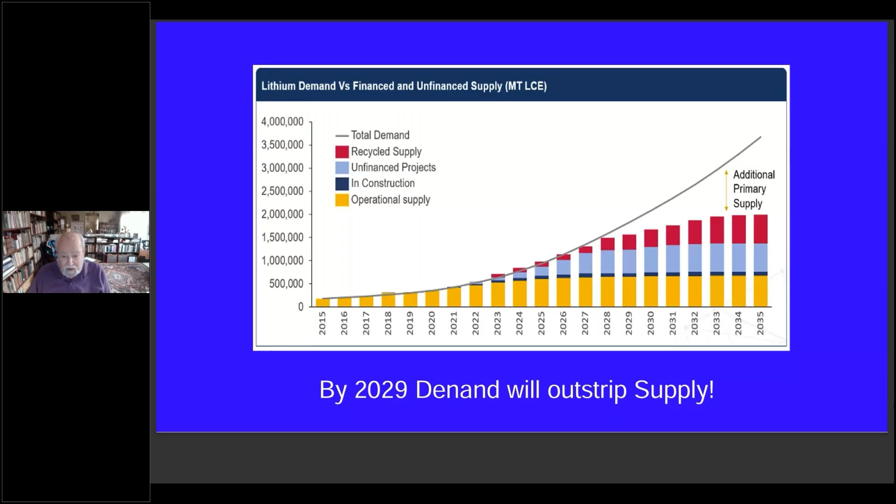And here is the graph. If you put all the various types of lithium reserves into a pot, it still isn't enough for the demand. And by 2029, demand will outstrip supply. Obviously, we have to do something.

We are looking for batteries using earth-abundant, domestically available, inexpensive materials. But at the same time, they should show performance characteristics similar to lithium ion. Doesn't have to be exactly equal, but they should be at least in the same range. And indeed, we can do that. Next, please.

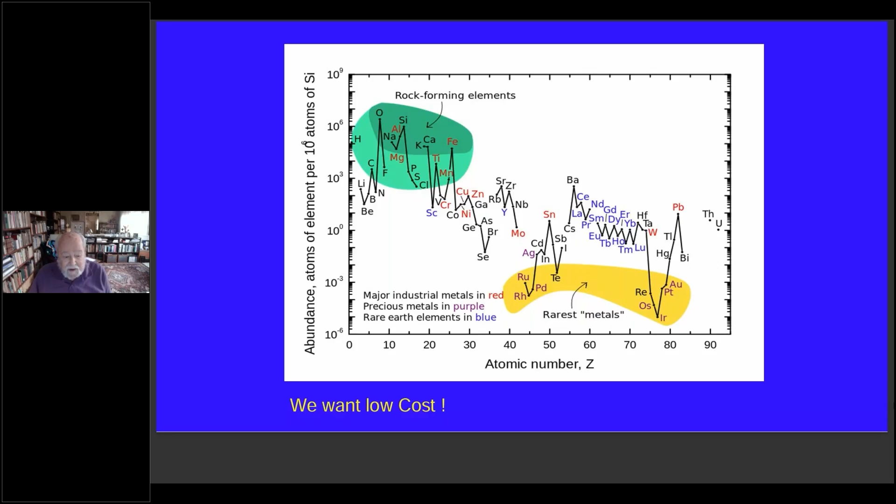Here is the chart of elements that are available. And where we want to be is up in the dark green of rock-forming elements. That means earth abundant. And you can see that sodium is right in there between oxygen and silicon, which is just sand. So definitely earth abundant. Next, please.

Is it less expensive? It certainly is. Lithium carbonate, the raw material for lithium batteries, is roughly $20,000 per ton. It varies considerably, but that seems to be the lowest price. Sodium carbonate, on the other hand, is $332 per ton. That's 2 orders of magnitude less.

And by the way, it's sodium carbonate, not table salt. Table salt is sodium chloride, and that's a different thing altogether. And what is really good is that there are 135 billion tons of mineable sodium carbonate available in the Green River Basin of Wyoming, right here in the US.

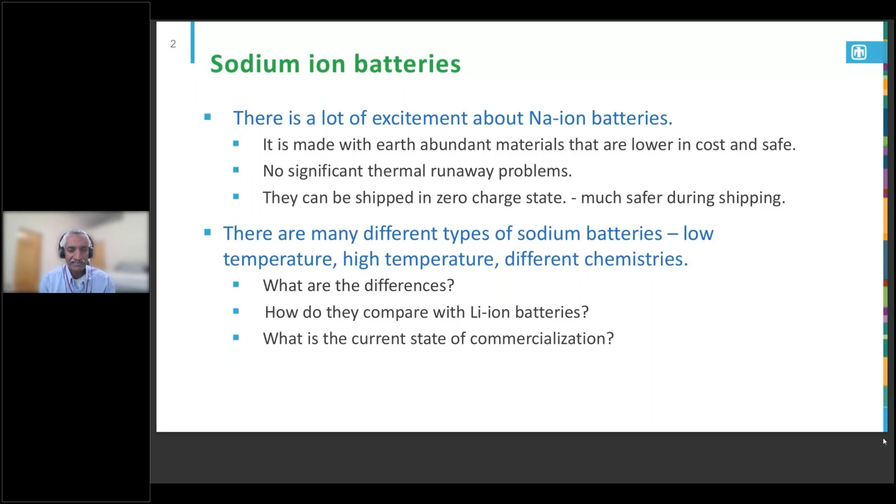There are many different types of sodium batteries. They're low temperature, high temperature, and different chemistries. So what are the differences? And how do they compare with lithium-ion batteries? And what is the current state of commercialization? So we'll touch on these aspects briefly in this presentation. Go to the next slide.

So this is a brief outline. First, I'll touch on some of the high temperature molten sodium batteries, followed by low temperature sodium-ion batteries that are analogous to lithium-ion batteries. We'll cover different chemistries, pros and cons, typical issues, and the current state of development. Next slide.

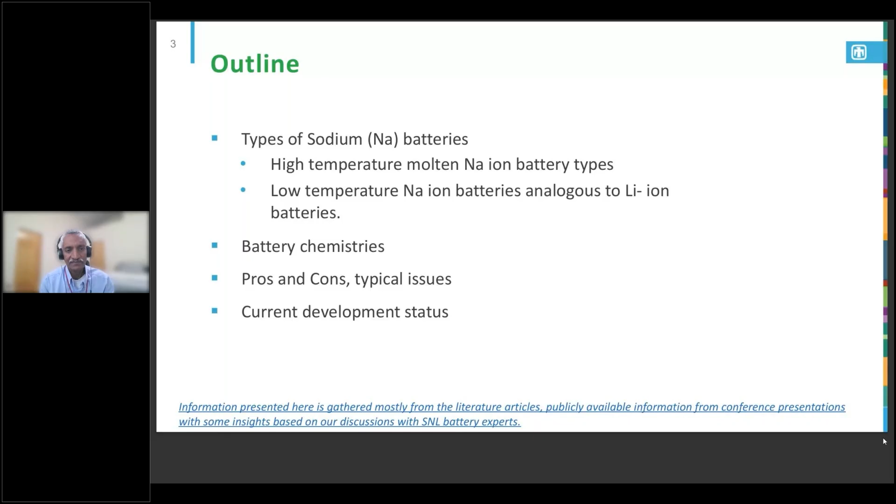So there are distinctly two different types of sodium batteries. One are high temperature, one are low temperature. These high temperature batteries are also called molten sodium batteries. Some are commercial, and some are still in the R&D stage. Sodium sulfur batteries and sodium metal halide are both commercial, and the intermediate and low temperature sodium batteries are still in the R&D stage.

Whereas low temperature sodium-ion batteries are, as I said, analogous to lithium-ion batteries. Some of them are early commercial, some at pre-commercial stage. Again, there are different types in these batteries also, based on type of anode and cathodes they use. For example, in the cathodes, some use layered oxides, some are polyanion, some are Prussian blue analogs, and in the anodes, some of them use hard carbon, some use Prussian blue analogs. So we will touch on them briefly. Go to the next slide.

Sodium sulfur batteries. This is one of the oldest battery chemistries, developed in the 1960s at the Ford Motor Company for automotive applications. This is a reaction between a molten sodium anode and a molten sulfur cathode, forming sodium sulfide. This molten sodium is contained in a solid ceramic tube made of beta alumina, so that's also the electrolyte.

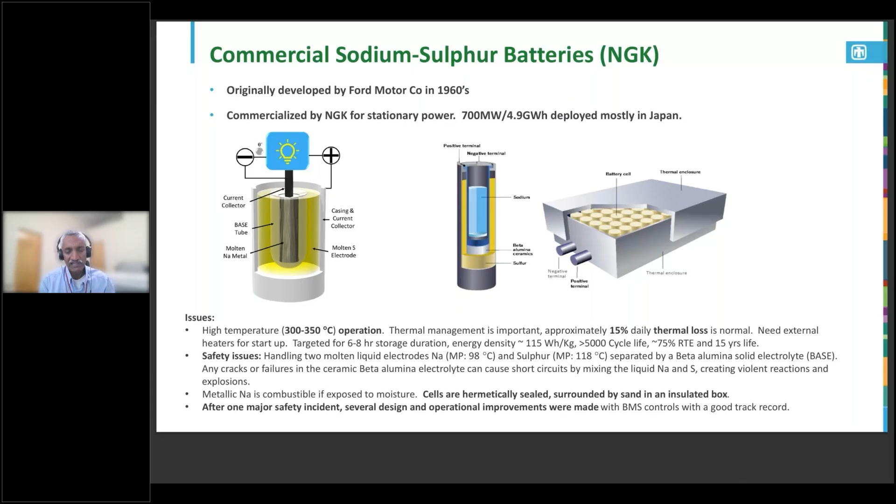They had one major safety incident in Japan at Tokyo Power. After that, they made a lot of improvements, and since then they really don't have any major safety accidents. They had good control after that. Go to the next slide.

Recently, BASF, a German chemical conglomerate, wanted to get into the energy storage area. They looked at a lot of different technologies and decided to partner with NGK and commercialize their sodium sulfur batteries market in Europe. They really don't change a whole lot in the design. They made some minor changes; the basic chemistry is the same, and the cell is the same. They made improvements in the safety aspects, and they actually passed UL 9540A container level thermal runaway tests. They are trying to commercialize this battery. Go to the next slide.

Another type is sodium metal chloride batteries. They are also known as Zebra batteries. Zebra stands for Zero Emission Battery Research Activities. It was originally developed in South Africa, but in the US, General Electric actually tried to commercialize these batteries for locomotive applications, and then they abandoned it after 5 years of putting a lot of money in it. These are commercial. Some companies are still selling them.

They also require high temperature operation, like 250 to 300 degrees Celsius. The difference here is instead of molten sulfur, they use molten sodium salt. These are slightly safer compared to sodium sulfur batteries. Energy density is slightly higher. Other than that, they're pretty similar. Go to the next slide.

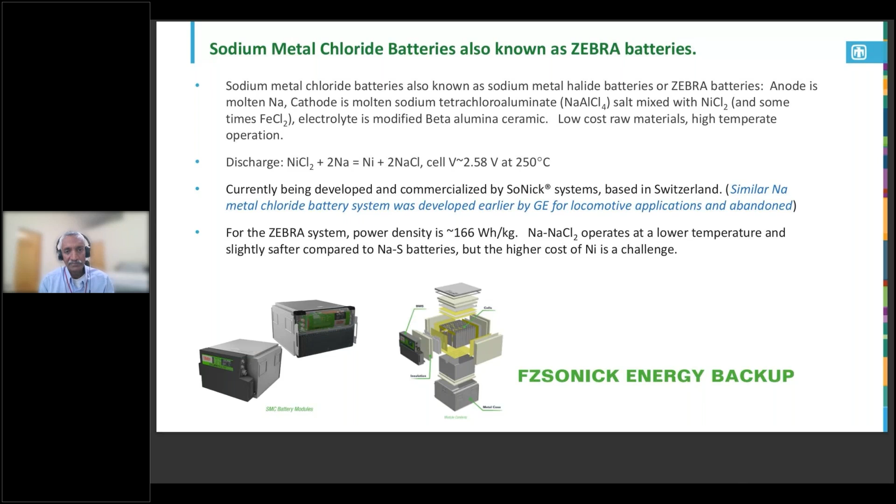These two are commercial, the ones I told you. And then these are pre-commercial, the next two I'm going to talk about. There are some companies trying to develop even lower temperature molten sodium batteries. One is Adena Power. This is out of Ohio State University. The difference here is they're using a NASICON solid electrolyte conductor instead of the sodium ion conductor that uses beta alumina, which is high temperature, which requires about 300 degrees C for sodium ion conductivity.

NASICON conducts sodium ions at a lower temperature, so about 125 to 150 degrees C is sufficient. The advantage is at this temperature you can use plastic seals. So they're going with a planar configuration and trying to develop these batteries. It is still in the pre-commercial to R&D stage. The next one. Next slide, please.

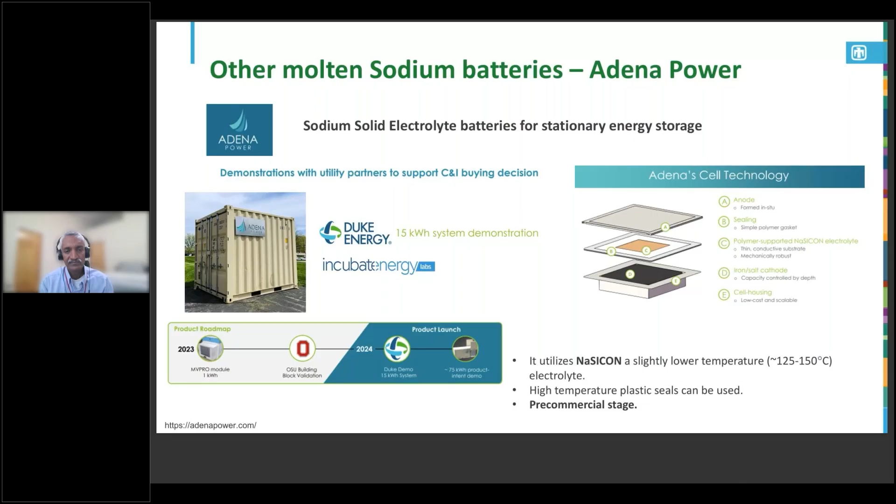This one is Enlighten. This is also in the early R&D stage. These guys came out of Ceramatec, which has a lot of experience in developing ceramic products and making NASICON membranes. So here, the twist on this one is they're trying to make a flow battery actually. The sulfur is in a sodium polysulfide on the cathode side, and on the anode side they're using molten sodium and a NASICON membrane. It is still in the R&D stage with some government contracts. They are developing this battery. Go to the next slide.

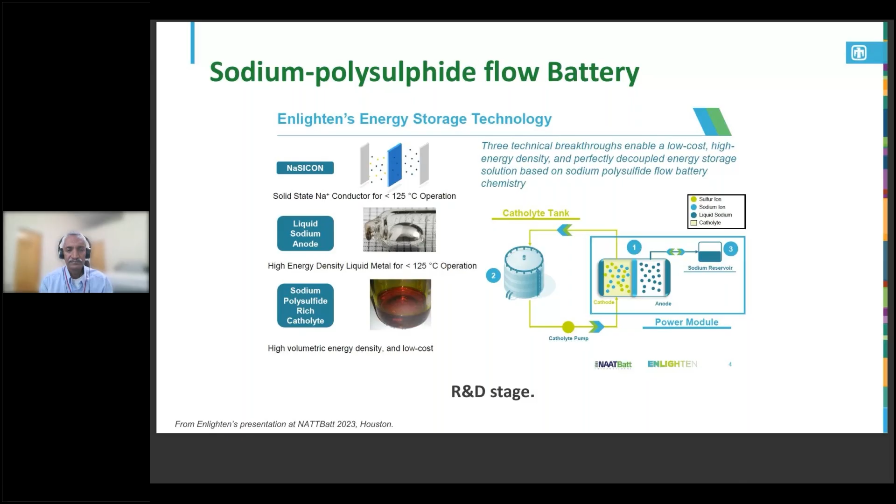Now we are switching gears to the low temperature sodium ion batteries, because until now we talked about high temperature batteries. These are very similar to the lithium-ion batteries. So you have an anode, either carbon or one of these layered oxides, and a cathode; sodium ions shuttle between the anode and cathode. Cathodes are sodium-based materials of different types, and anodes are hard carbon, some intercalation oxides, conversion alloys. There are 3 different types. And cathodes, I showed you, there are 3 different types there too.

Electrolytes are, most of them, organic. There are a few systems with aqueous electrolytes also. And the separator is a polymer membrane, very similar to the lithium-ion battery. One difference is the current collector. In a lithium-ion battery, you have a copper current collector on the anode side and aluminum on the cathode side, whereas these batteries use aluminum on both sides, which is cheaper and also easier to maintain. So during charging, sodium ions move from cathode to anode, and the reverse occurs during discharge.

In lithium-ion batteries, they shuttle between the graphite and the layered perovskites. The graphite anodes used in lithium-ion are not suitable for sodium-ion. They fail very easily during cycling. You need a hard carbon, which is actually disordered carbon, for the sodium-ion batteries. Sodium ions are slightly bigger than lithium ions, and they put more stress on the intercalation materials.

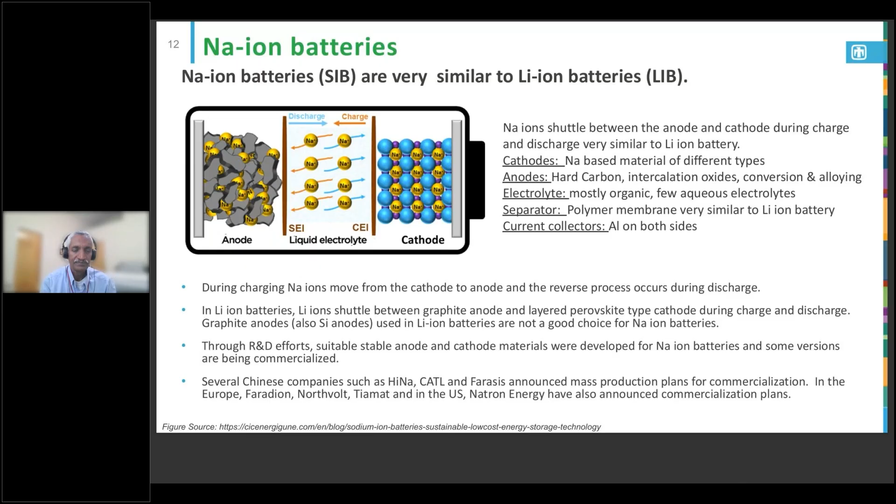And then, as I pointed out, they use aluminum current collectors on both sides, so slightly lower cost. I'm saying about 10 to 20% cost advantage for sodium ion compared to lithium ion batteries. Even though there is a big difference in lithium carbonate and sodium carbonate raw material cost, the amount of lithium in a lithium ion battery is only about 7 to 8%. The rest of the components are layered perovskites, current collectors, and the separator, so those don't change a whole lot. So the difference is in the lithium cost and the current collector cost. So about 10 to 20% cost advantage over lithium ion batteries. Go to the next slide, please.

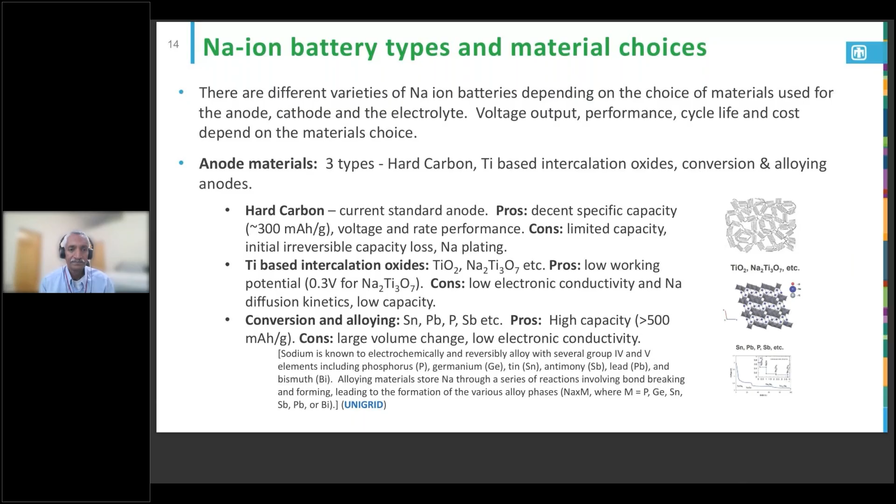On the cathodes, again, there are, you see, 3 different types: layered oxides, which Faradion is using, and polyanionic, Tiamat, and Prussian blue, which Natron Energy is using. The differences depend upon the type of anode and cathode you use. Battery energy density changes and also the cycle life.

Electrolytes: most of them are using organic solvents with sodium salts, very typical as in lithium-ion batteries, ethylene carbonate and propylene carbonate. The only difference is in the salts. Instead of lithium salts, they use sodium salts, like sodium perchlorate or sodium hexafluorophosphate. Only Natron is using aqueous electrolyte. It has advantages, but it has a lower cell voltage with the aqueous electrolytes. So the energy density is slightly lower, but it's safe compared to organic electrolytes.

Yeah, we already touched on the current collector. Lithium-ion batteries need copper at the anode and aluminum at the cathode, whereas aluminum is used at both anode and cathode in sodium-ion batteries. Go to the next slide.

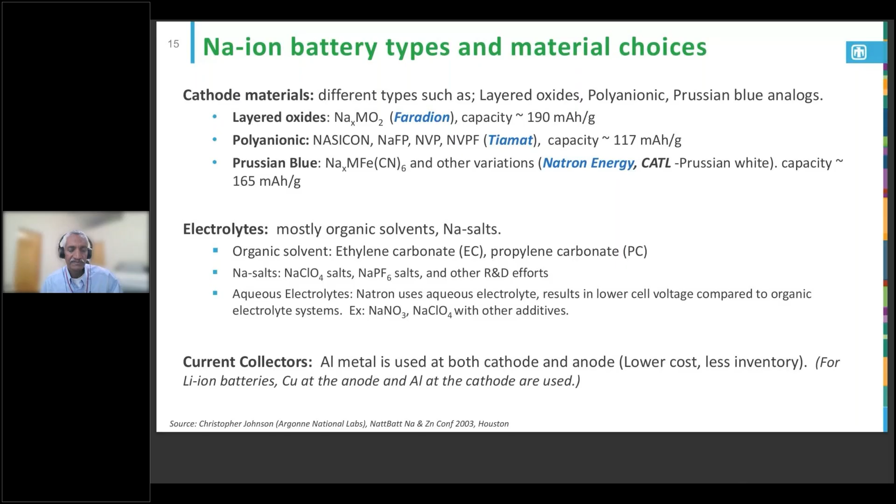Yeah, this shows a schematic summary of the things we just discussed. So on the anode side, there are 3 different types of anodes: hard carbon, intercalation oxides, and then conversion alloying anodes. On the cathode side, you have transition metal oxides, or polyanions, or Prussian blue. Electrolytes are aqueous or non-aqueous. Most of them are non-aqueous, and we see only a few aqueous electrolytes. Go to the next slide.

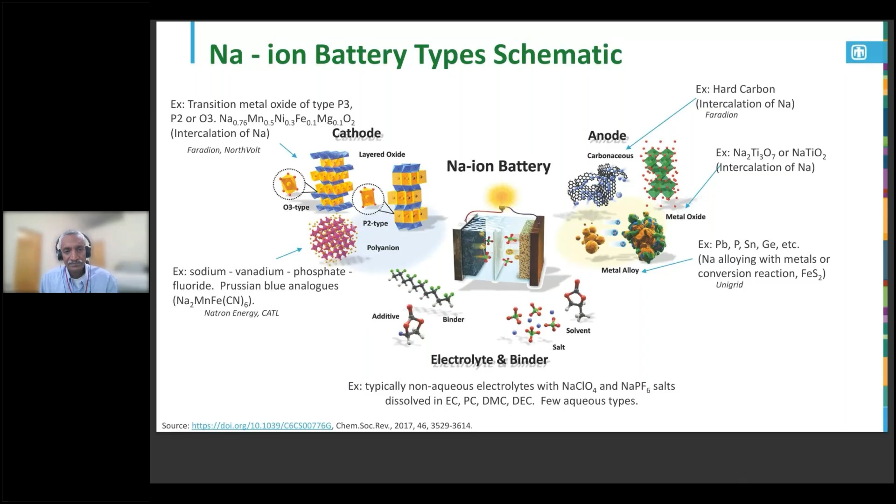Here I try to summarize, based on the literature information, some of the different types of sodium-ion batteries that are currently being developed by Faradion, Tiamat, HiNa, and Natron Energy. Anodes: the first 3 all use hard carbon, except Natron uses Prussian blue. That is the only company using Prussian blue analogs for both anode and cathode. Faradion is using layered oxide, Tiamat is polyanionic. Electrolyte: the first 3 are using organic electrolytes. Natron is using aqueous electrolyte.

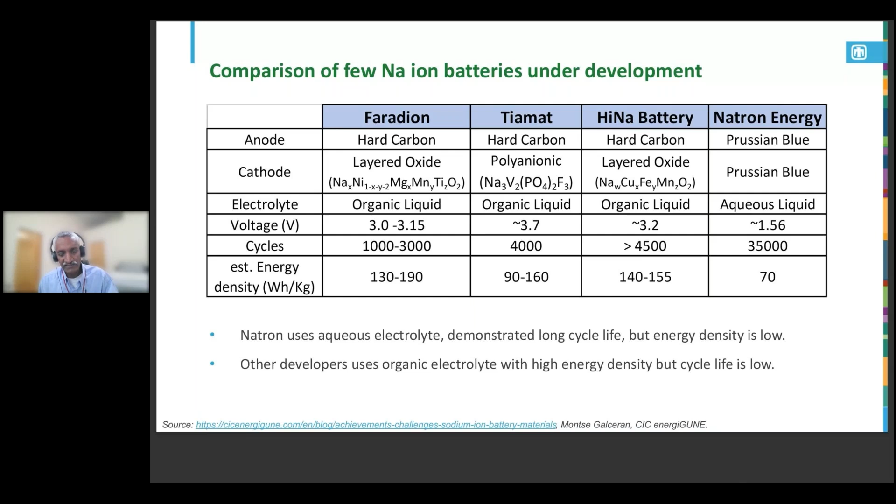So you can see that the voltage is lower compared to the other ones, and because of that, energy density is low. But if you look at the cycle life, they showed a very large cycle life. The Natron Prussian blue analogs have 3D structures with large, let's say, cavities for the transport in and out of sodium ions. Because of that, it puts less stress on the material, so it has a large cycle life. Go to the next slide.

So this is my last slide. Compared to lithium-ion batteries, sodium-ion batteries are lower in cost and use earth-abundant materials. They don't use any lithium or cobalt, and very low or no nickel. They utilize aluminum current collectors on both sides. So the main differences between these two are in the cathode materials and the current collectors. Because of that, the manufacturing processes are also very similar. So we have a 10 to 20% cost advantage over lithium-ion batteries because of the lower raw material cost.

They have a lower energy density compared to NMC batteries, but the performance is comparable to LFP batteries, which are their main competition. They offer better low temperature performance compared to lithium-ion batteries, and they can be stored and transported in a 0-volt state, so it's much safer for transportation. Whereas lithium-ion batteries you always have to store under some minimum charge.

As I discussed a little bit earlier, sodium ions are larger than lithium ions. It puts more stress on the anode and cathode during intercalation, leading to structural failures during charge and discharge. So cycle life is one of the important criteria. Except Prussian blue analogs, which have a good cycle life. The main challenges with sodium-ion batteries are increasing the cycle life, increasing the energy density, and scaling up for high volume manufacturing, which you're going to hear a little bit more about from Natron.

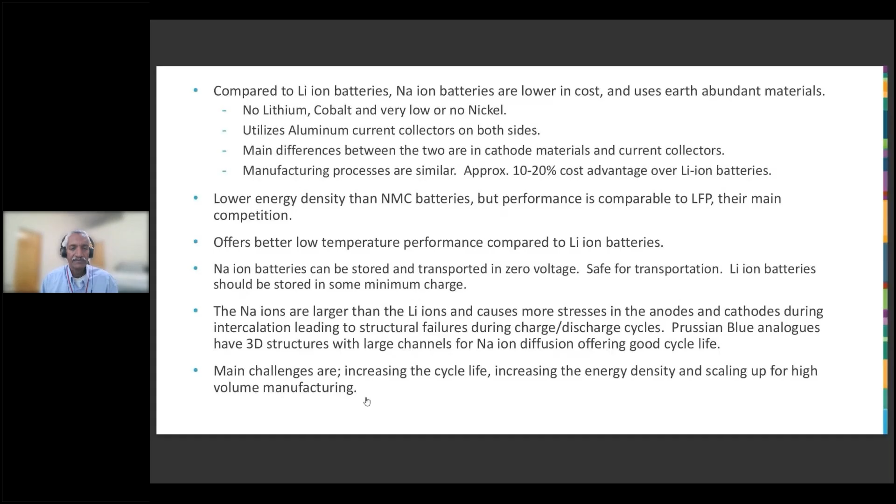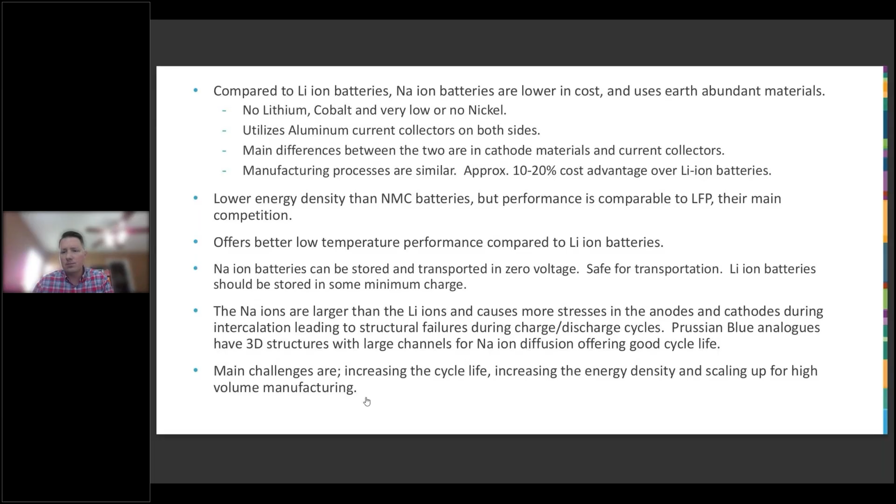We're going to hear from Alex Bates from Sandia on safety issues, and then from Jack from Natron on commercial markets and applications.

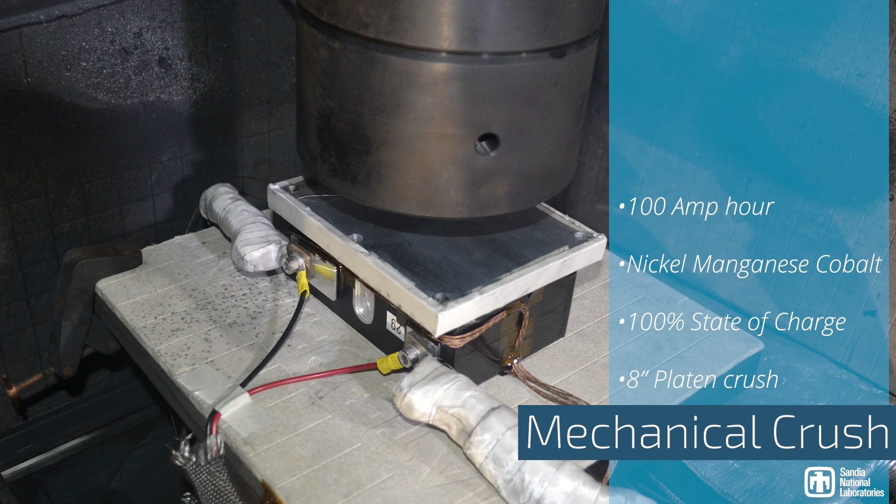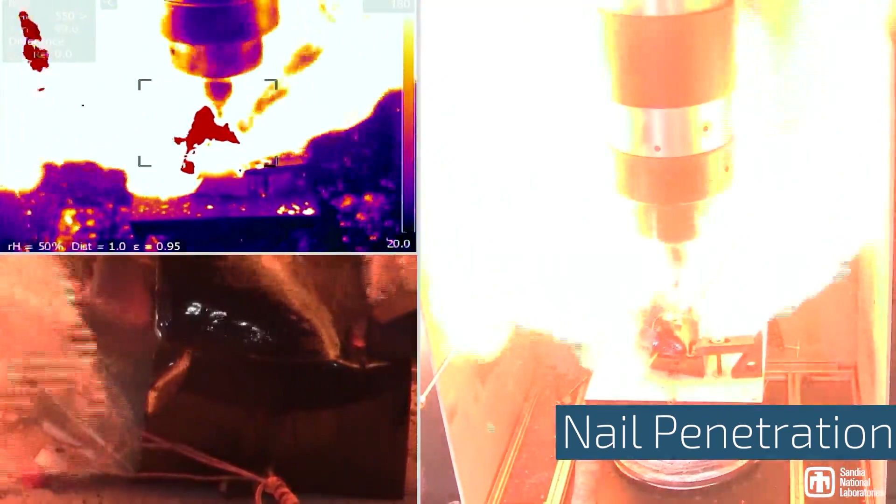So this is just a demonstration reel of some of the testing at Sandia. So if you can go ahead and play the video, I'll talk through it. All right, so this is a 100 amp hour NMC crush test. So NMC rechargeable lithium-ion battery. It causes internal shorting of the layers almost immediately, and of course the cell does not like that, and it burns. This is nail penetration, and it's a similar effect, but different on the can. In that case, you see a lot of swelling. So the pressure increase is too rapid.

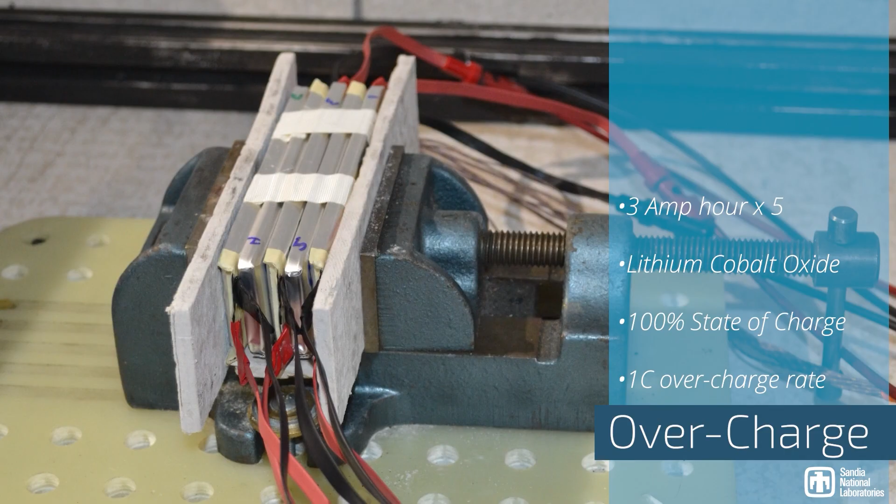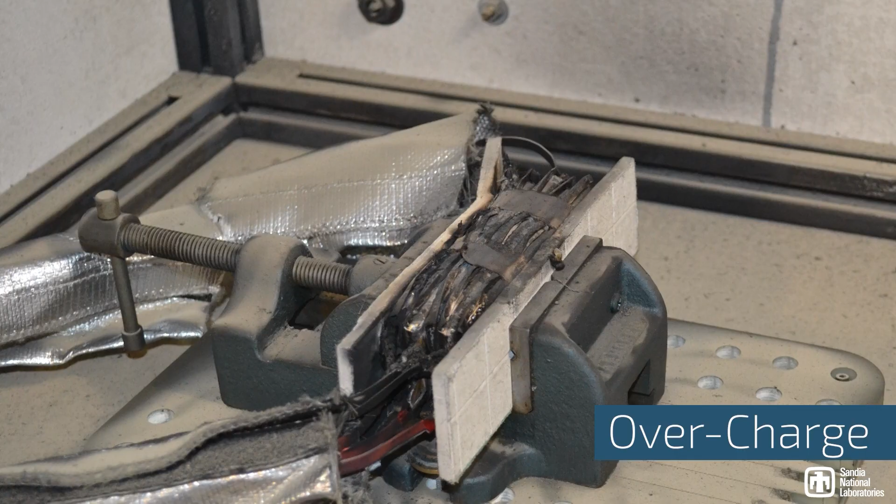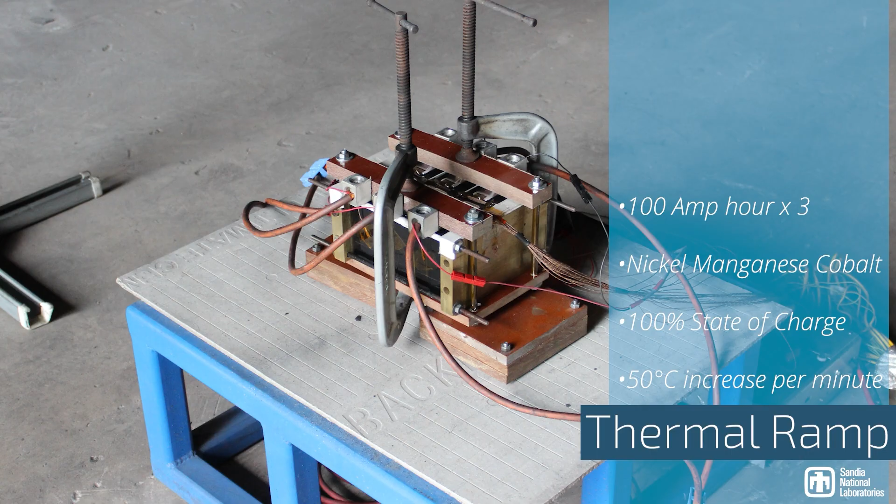This is the bunker. So this is the burn site out in the middle of the desert. This is a 3-cell 100 amp hour NMC pack. We're trying to look at propagation from cell to cell. In this case, the thin sheet of metal was capable of preventing that cell-to-cell propagation. So you can bring the slides back up. There are a fair amount of videos in this presentation, so please bear with us.

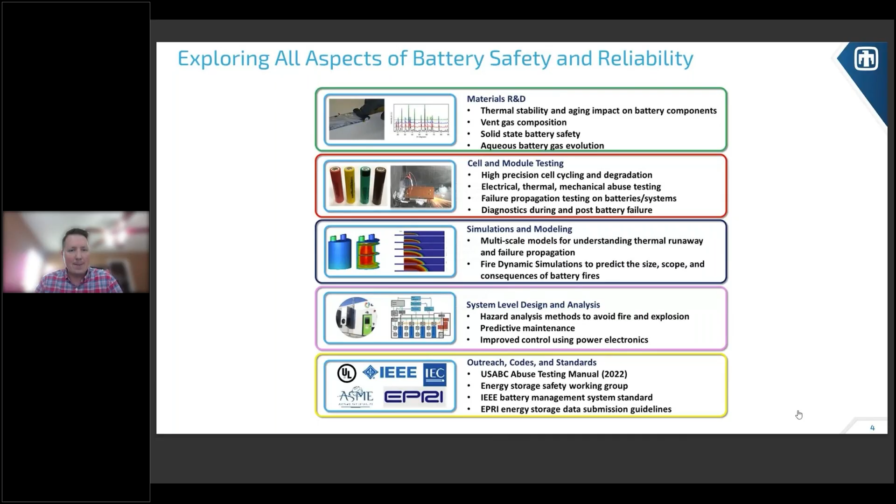This slide is to demonstrate that Sandia does safety from materials level all the way through codes and standards. My colleague, Loraine Torres-Castro, co-wrote the USABC Abuse Testing Manual. I like to highlight the center bubble, that's simulations and modeling. We do expensive testing, so we make every effort that we can to take that data and utilize that data in simulations and modeling. I can go ahead and go to the next slide. So that's it about Sandia's capability.

So we'll move right into sodium ion safety. As Ramesh mentioned, sodium ion is intriguing because of potentials for lower materials cost. It also has similar performance to lithium ion. And one of the key factors is that it has similar fabrication requirements. So it's kind of plug and play. You can go ahead and click through, I think, twice just to bring everything up.

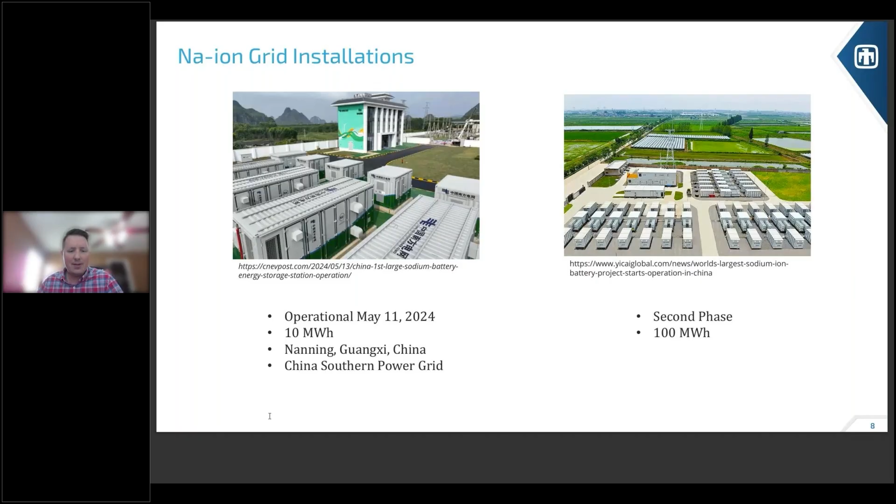So I'd like to preface this: sodium ion is commercialized. It has been commercialized by a Chinese company. They have a 10 megawatt hour grid installation that went operational May 11th. And they're planning to increase that to 100 megawatt hours. Next slide. Yeah, click again.

So the iteration that we got is what's shown here. We received these at 1.5 amp hours. We tested them. They came out experimentally at 1.43 amp hours. If you look at that in terms of energy density, you get 123 watt hours per kilogram. That's with the case. However, if you're not familiar with these numbers, that's pretty substantially lower than a modern commercial lithium ion.

We did some materials characterization. So we took the can apart, took all the materials out, did characterization. We found this to be the layered metal oxide variety. So if you recall from Ramesh's slide, there's a layered metal oxide, there's a Prussian blue, and there's a polyanion version of current cathodes for these cells. This is the layered metal oxide iteration. As he also mentioned, hard carbon is pretty prevalent. These were hard carbon anode.

The salt is kind of a corollary to lithium ion, which is LiPF6. In this case, it's NaPF6, or sodium. And then the solvent that you see there is a combination of typical organic solvents that you would see in a standard lithium-ion battery. So there's almost no difference in the type of solvent in this cell between sodium-ion and lithium-ion. Next.

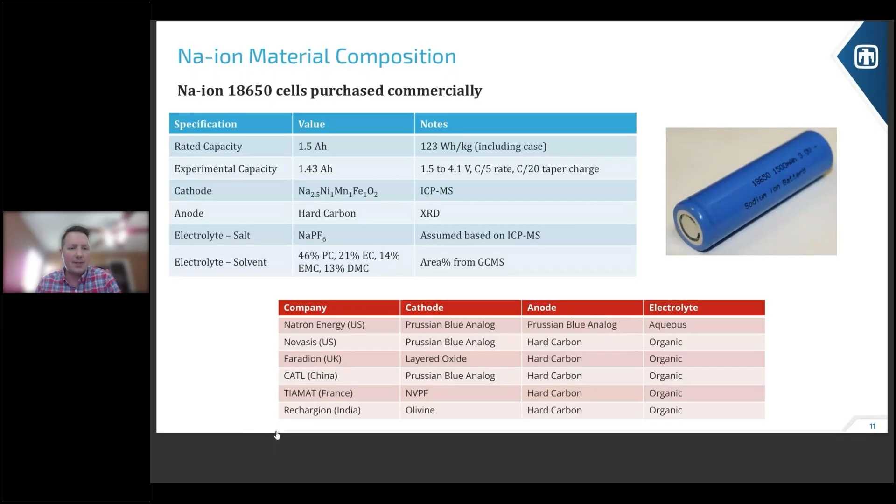I think we have another video. Yep. So this is sodium ion 18650, commercially purchased from an overseas vendor, and we're doing a nail penetration on this cell. Yeah, most of the rest of the videos are pretty quick, pretty abrupt. You can go ahead and bring the slides back up.

Now, there's a bit of an asterisk here. NMC cells do tend to be pretty destructive under nail penetrations, but this cell was quite low in capacity compared to modern lithium ion NMCs. And so we believe that's why the lower temperature was obtained. Of course, you saw in the video, the sodium ion was quite destructive in its failure response. There were sparks, smoke, venting, and it broke itself free from that fixturing.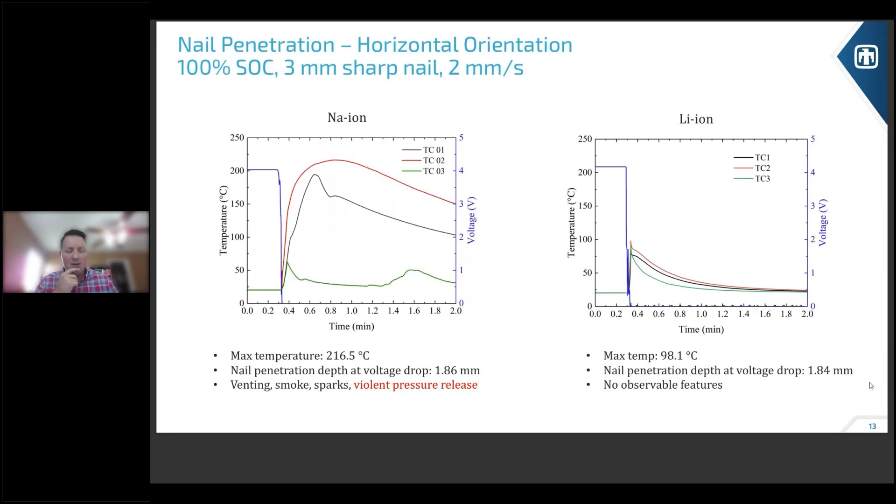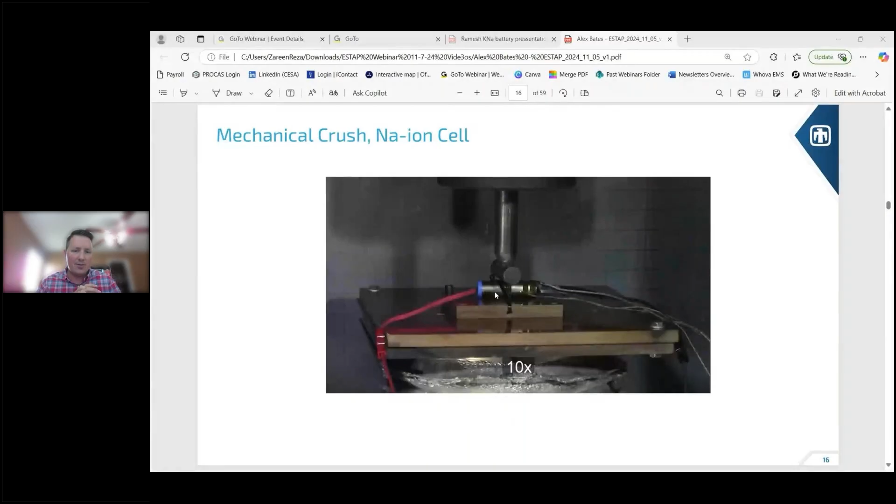So the next test we did, we call a crush test, or a mechanical crush. This one is a video, so you can go ahead and bring that up. We have a hammer type implement that we drive into the cell. So we're just simply pushing that round bar into the cell horizontally.

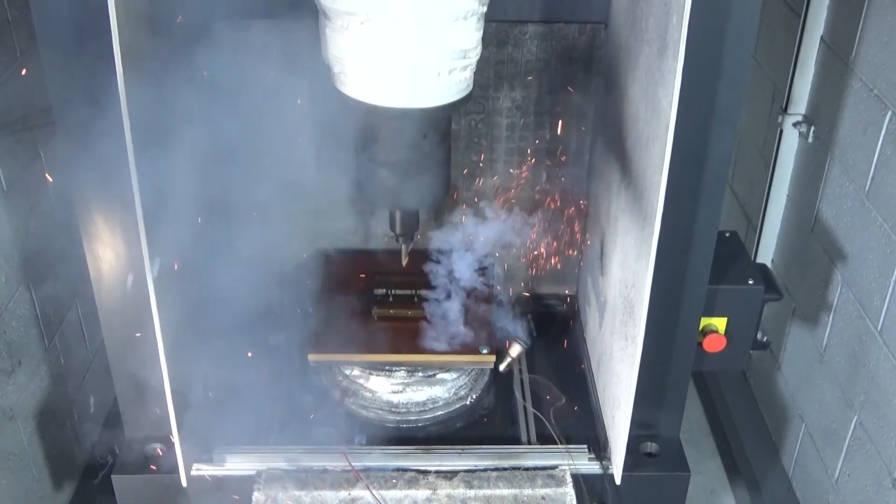Yeah, that's the slowed down version of the nail penetration. I like to show that in live presentations because it's kind of more dramatic. But yeah, go ahead and play the next video.

So as you can see, it's kind of a similar response to the nail penetration. The hammer implement was holding the cell in place, so it didn't remove itself from the fixturing. But you got a similar response, that kind of rapid pressure increase that blows the lid of the can off.

Yeah, thank you. And then you also saw that there was a smoldering ember next to the cell, and that actually caught the vent gases on fire. So they are flammable under the right conditions, which we would expect because, as I said previously, it is a mixture of typical organic solvents that you would see even in a lithium-ion battery.

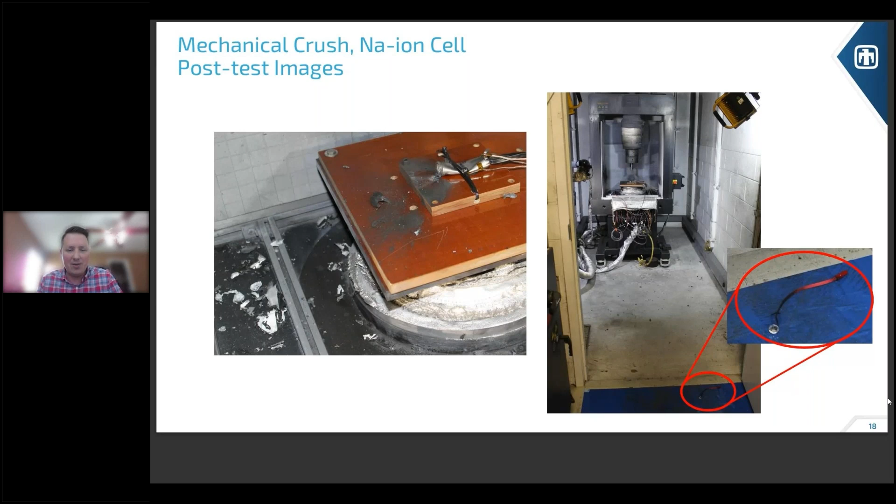There's normally a door closed during this test, and that door was closed. But when we came in, we found the cap of the 18650 had actually ejected all the way out of the bay underneath that door. Next.

So we're moving on to a different type of test. This is an external short circuit. So we have the cell fixed to a circuit that we close, and when we close, it allows the cell to dump all of its energy almost immediately.

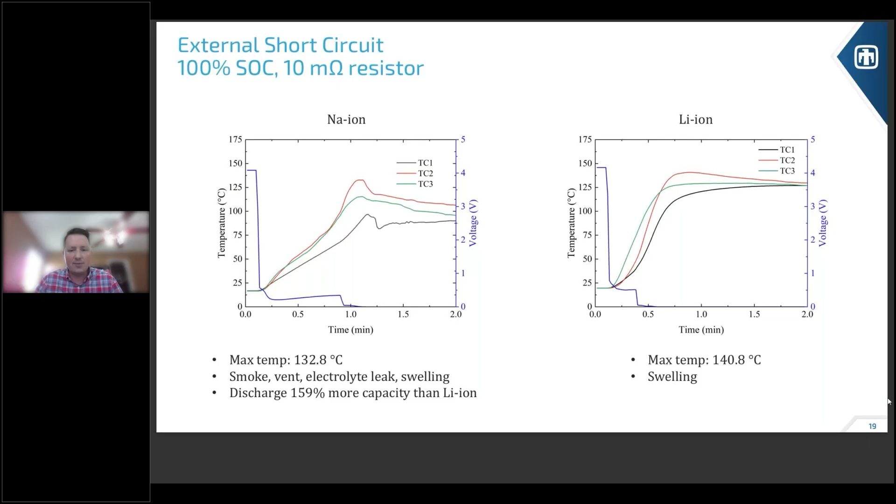The lithium ion and the sodium ion both got to about similar temperatures, around 140 degrees C. The lithium ion only swelled, but the sodium ion actually smoked, vented, and had electrolyte leaking out. And it discharged 159% more capacity than the lithium ion. So next we have another video. You can go ahead and play that one.

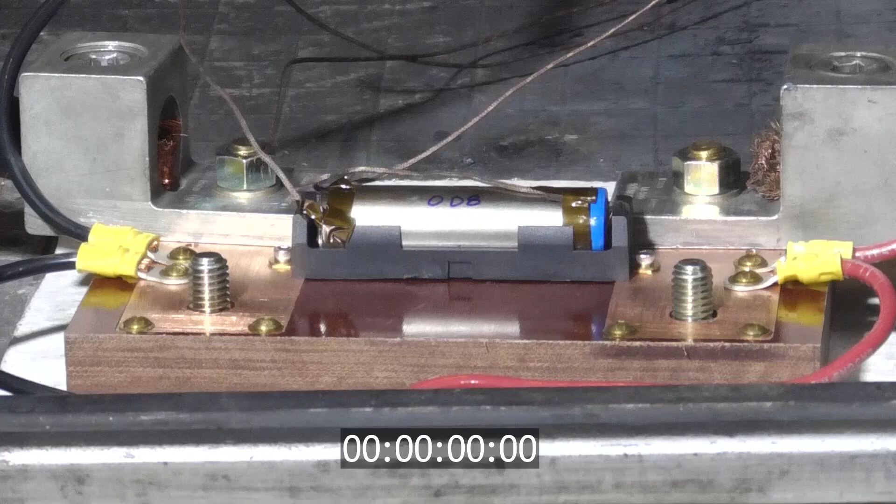Normally for external shorts, we don't see a whole lot. So it was a little surprising to actually get a vent, a diffused vent in this external short. So at first you'll hear a loud sound. It's the external contactors closing.

You will see a little bit of smoke that's from the fixturing getting too hot, but then you'll hear an audible pop that's from the vent itself. And then if you look below the fixture at the vent, you'll see some leaked electrolyte.

Okay, so as I described from the external short, the sodium ion showed us more than the lithium ion. Like I said, there was a vent and leaking, which we don't normally see for lithium ion. So that was interesting. And I think it's a product of what Ramesh said, the sodium ion cells, they can be a little bit more performance based in the discharge aspect, which, as I said, we discharged more in that external short. So we see that.

We were a little perplexed by this at first. We actually did a repeat test just to make sure that this was valid, but it is, and if you think about it a little bit more, it makes some sense. Both of these sodium ion and lithium ion cells are layered metal oxide cathodes. They both have a carbon-containing anode, and they both have organic liquid electrolytes. So there's a very similar corollary and composition between both 18650 cells.

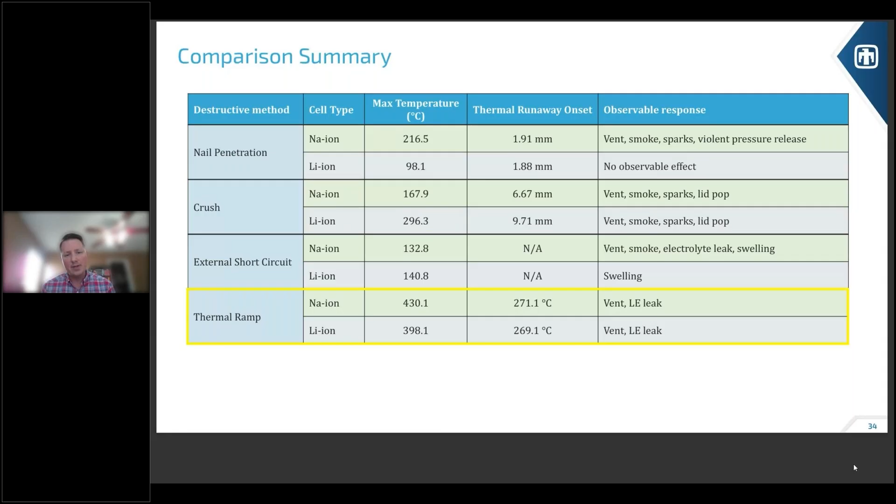The key takeaway here is that sodium ion is not good under mechanical failure. Mechanical failure tends to result in this rapid pressure increase and destruction. And we also had a more robust failure under external short circuit for sodium ion than lithium ion.

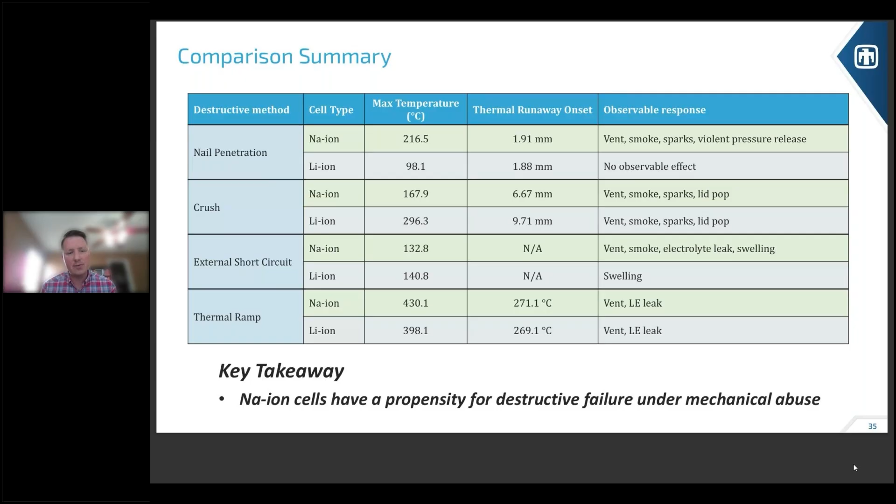Next. Okay, so I like to preface this next section, and I'll try to go through this quickly because I think we're kind of hitting some time constraints. Maybe we have one more presentation.

This is the Ford EcoStar. So I don't know how many of you have seen the Ford EcoStar, but sodium sulfur technology was first looked at Ford in 1965. And then it was researched off and on for about 30 years. And then in '93, they decided to make 100 prototype EcoStars. This was a sodium sulfur technology, so totally different than what we have today.

But these cars were expensive. They were hand built, and they took a lot of time, a lot of research hours to make. But unfortunately, between '93 and '96, 2 of these vehicles caught fire while charging. And then in '97, Ford shut down the program entirely.

So of course, they definitely learned a lot through this whole process, but at the end of the day, they had nothing that they could profit from. So a lot of time, energy, and money went into this development with nothing to show at the end in terms of profitability. The reason I like to show this is at Sandia, we are very interested in safety at

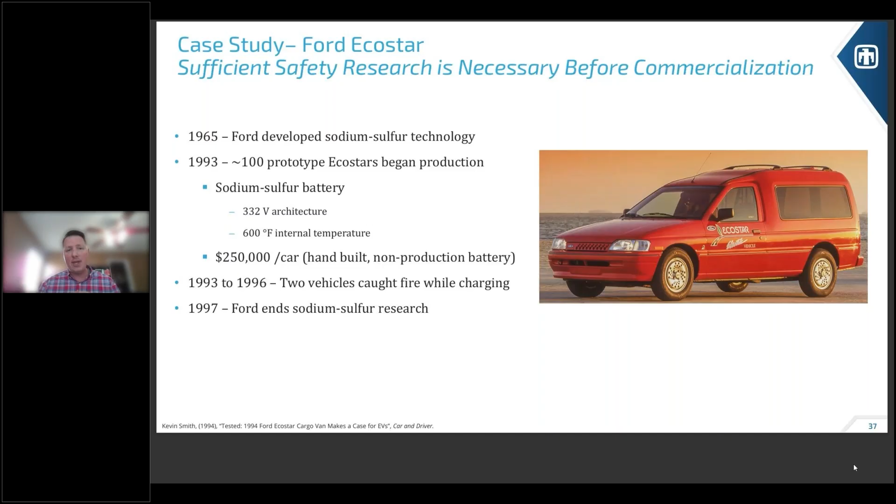the material scale. Now, if Ford had access to some of the capabilities that we have now, they may have done some materials level analysis that gave them insight into why this failure happened or why this failure could happen. And they may have made some different changes in the direction of the program. They could have implemented more engineering controls, or they could have better made some changes at the material scale to prevent this kind of destructive failure.

Next slide. Okay, so this is, again, as I said, material scale approach to safety analysis. This is kind of a new area of research at Sandia and even across the whole research field. At Sandia, we're looking at a handful of new chemistries, things like lithium sulfur, sodium ion, solid state batteries, and we're using this similar material scale approach.

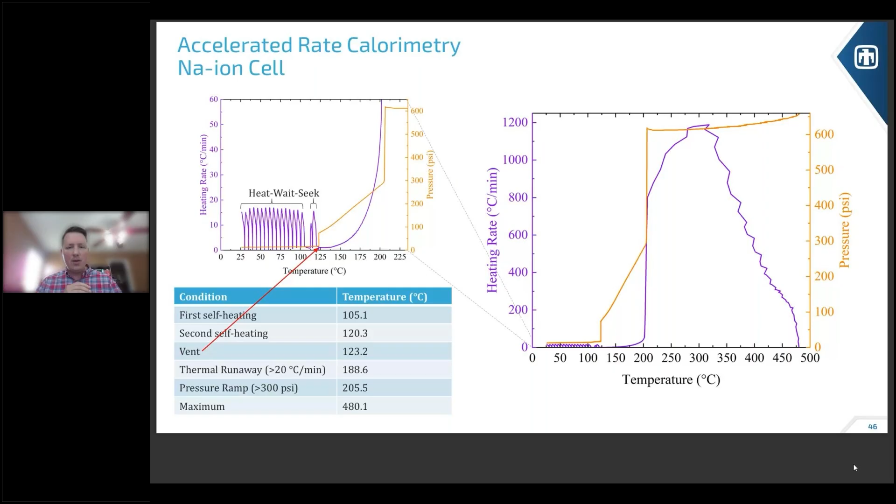So why am I showing you ARC? I'm showing you ARC to compare to the DSC. The top plot is a full 18650 cell. That's the cell that we purchased, we got in our hands, we stuck it in the ARC, and then we ramped up the temperature and looked at the response. The bottom one is the one that is only 4 millimeters diameter. So just very small sample sizes and a calorimeter.

What I want to demonstrate is that there is a corollary between the materials and this large scale response. Next. So you're going to see a line pop up. Oh, did we just, yeah. The first dashed line corresponds with self-heating in the full 18650 and the small exotherm in the DSC. The second dashed line corresponds with the second self-heating and the medium-sized exotherm in DSC.

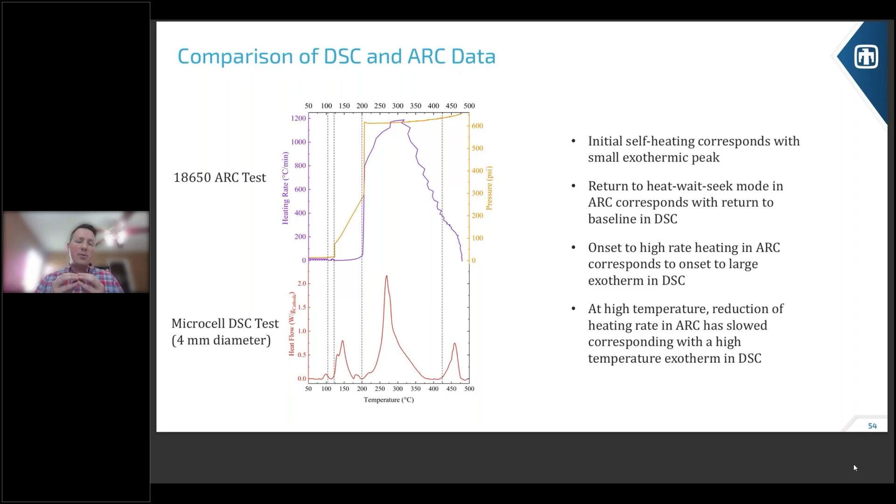And then the next dashed line at 200 degrees C corresponds with the onset to thermal runaway, which also is the onset to this largest exotherm. So now we have a direct corollary between a very large exotherm at a very small scale and an actual thermal runaway in a real 18650 battery.

Next. I think this is pretty much the end, so I have a couple things to point out. Actually, this is an important slide. Rachel Carter at U.S. Naval Research Labs has also done testing on sodium-ion batteries. This is ARC, similar to what I showed you before. The red curve is the same cells that we had at Sandia. And her results on this ARC testing correlate very well with our results. We're seeing the same things.

But the reason I like to show this slide is that the blue curve is a Prussian blue iteration of sodium ion, and the green curve is a polyanion iteration of sodium ion. You can see that the blue and green curves have a very different response to that red curve. The blue curve has a much higher temperature till it actually hits a self-heating event, and the maximum temperature is quite low compared to the layered metal oxide.

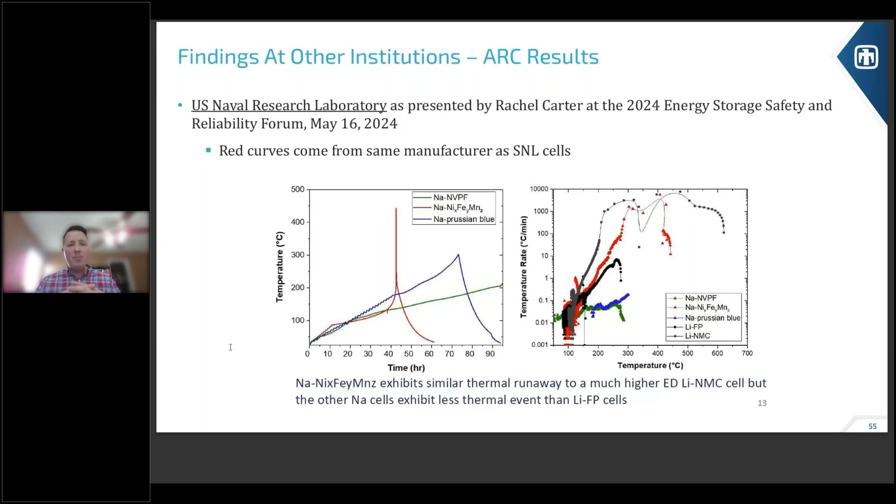And so what I mean to demonstrate here is that not all sodium ion batteries are created equally. The current version of commercial sodium ion appears to be quite dangerous and even on par with lithium ion. However, other types of sodium ion, it appears, may be much safer than the type of sodium ion that we got at Sandia. Next. Sandia is doing a cycling reliability study.

If you're familiar with some work that Dr. Gyuk has supported at Sandia for quite some time, they did this for lithium ion. Yes, of course, I'm almost done. And we're doing a very similar study for sodium ion, also funded by the Office of Electricity. Go ahead, next slide. I think that pretty much concludes it.

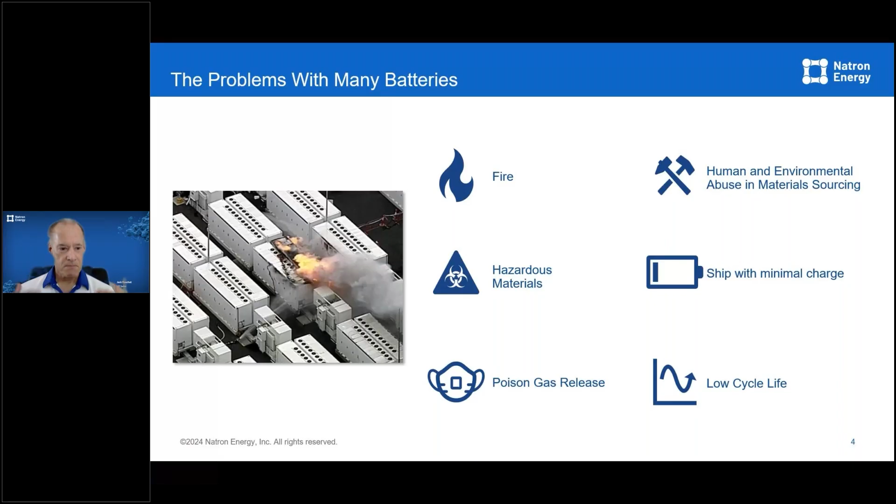So when we look specifically at Prussian blue analog sodium ion batteries, we eliminate many issues that we have with batteries. As previously noted by the other speakers, we don't get energy density. That's fine. Stationary power we're talking about here, and many other applications, military, industrial power applications where space is really not a constraint. Loss of life, loss of materials, those are critical. High cycle rate, as noted by a few others. When we get into the Prussian blue analogs, we're going to get more specific on that in a moment. You get the benefit of very low internal impedance, very, very high cycle rate.

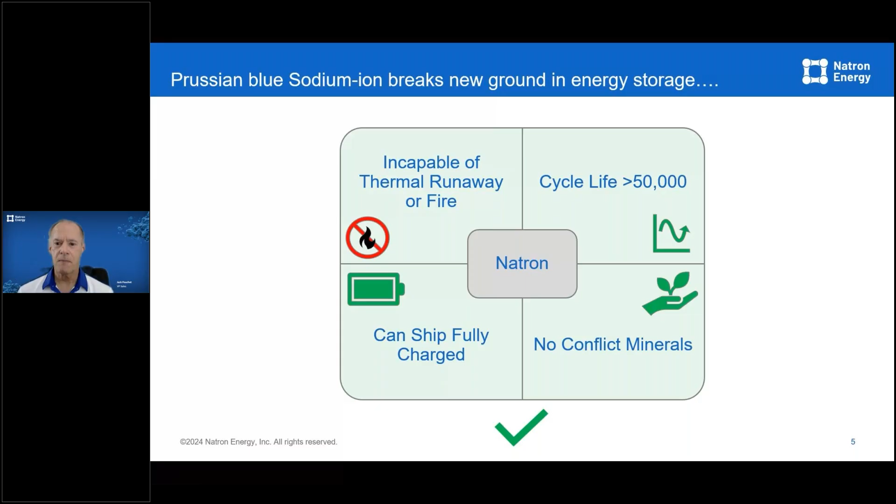Move on to the next, and I'm trying to accelerate my rate of speaking, so please bear with me.

Got a couple other things, and CATL and HiNa brought this up a couple of years ago. One of the benefits of sodium ion when we look at the EV application, of course, it does involve hard carbon and thermal runaway, but you can charge it at low temperatures. With Prussian blue, you can charge at -50. You can discharge at -50. You can also run at very high temperatures. So you get a really wide dynamic range.

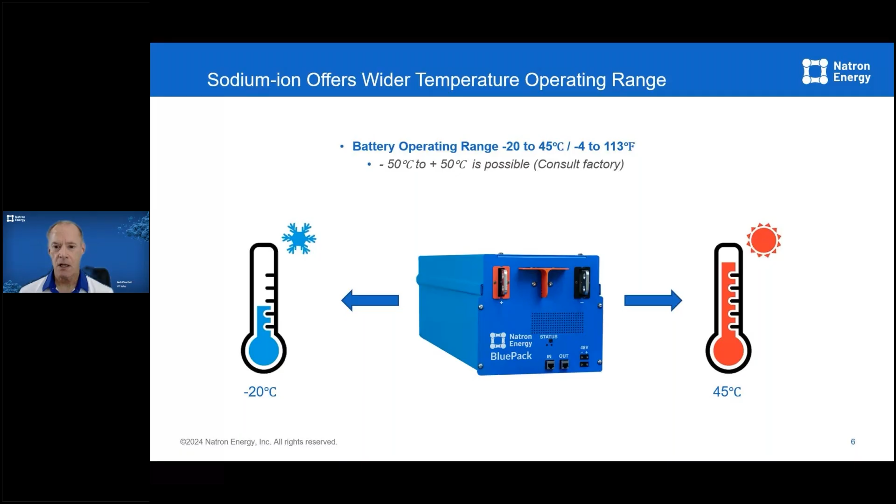Again, stationary power, what does that mean? Well, the lower cost of installation. You don't have to keep these things as cool. You don't have to keep them as hot in the wintertime, right? So when you look at the overall system benefits, you might find that when you look at sodium-ion batteries, there's unique benefits that you get at a total system installation cost point. Let's move on.

We'll go on to safety. And I really appreciate those videos. Those were phenomenal. Folks, if you go to Natron's website, you can see some incredible videos. We model most of the UL 9540A testing, the nail penetration test, love it. I'll just share with you, every safety agency that has tested our battery so far has said it is the most boring battery that they have ever tested. We have taken them up over 350 degrees Celsius, and they still put out voltage. We actually had the electrodes burn, not on the cell, but the test equipment.

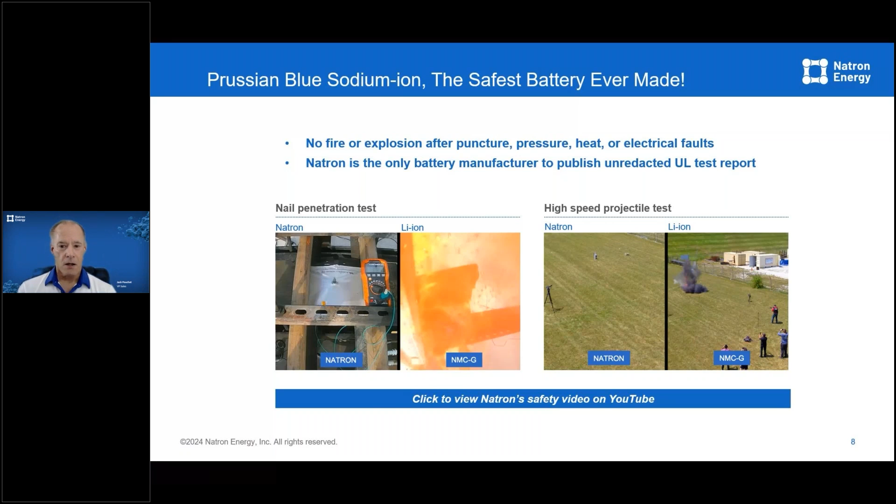Projectile testing, nothing like shooting it with a 5.56 or a 7.62 round bullet and finding that nothing happens. There's no acid leak, there's no outgassing, there's no hazardous materials, and the cell or battery continues to perform. Next. Next slide. Okay, so there we go.

Again, Prussian blue analogs. Not all sodium-ion batteries are created equally, as was previously noted. With Prussian blue analogs, we can ship these fully charged anywhere in the world by air, right? So that safety also translates into speed of installation, speed of use, because if you can get your battery to a site fully charged, you might save anywhere from 8 hours to 2 days. 2 days would be a nickel zinc battery, but you might be saving up to 2 days to get that system up and fully charged, right? You're good to go. Some huge benefits there.

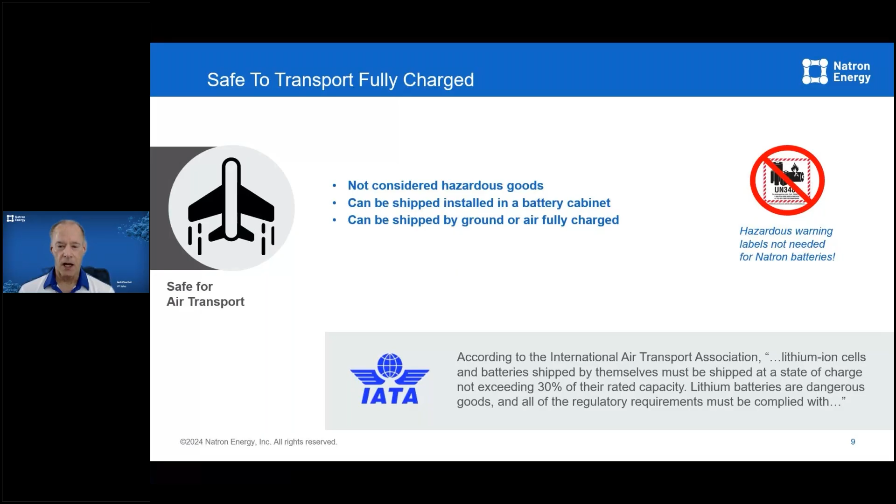Next. I want to get a little bit into some of the technology. Thank you. So, with Prussian blue, intercalation is not a problem. So if we hone in on, and we're not going to put it on this slide, but if you hone in on the lattice structure of the Prussian blue framework, you see it is a space roughly about 1.2 angstroms. And if we look at the sodium ion, it's 0.9. So the beauty is that we can intercalate with ease.

The internal impedance is somewhere between 1/4 to 1/10 of what we see in traditional lithium ion or other battery chemistries. And that allows for rapid charge, rapid discharge, no deformation, no requirements for SEI layers, high cycle count, no thermal buildup. I mean, it is a unique set of properties. What do we give up? As previously noted in the other slides, you give up energy density. We're talking stationary power, folks. Land's cheap. All right, next slide.

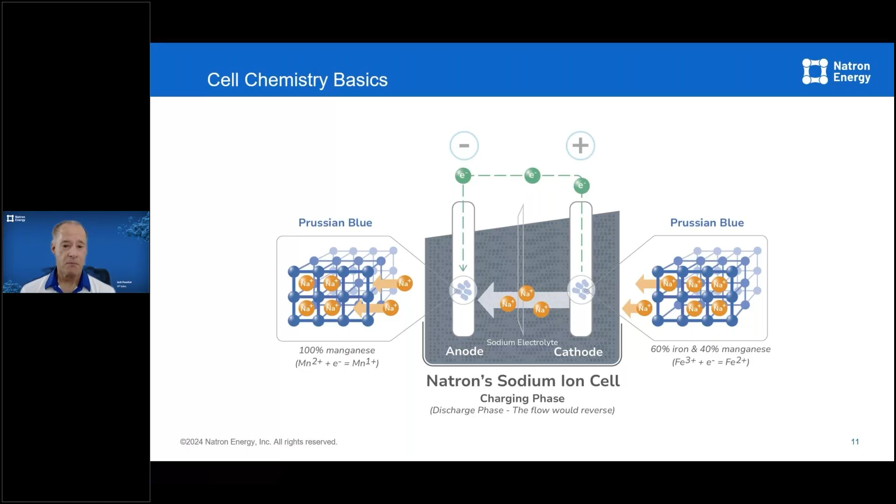Yeah, so as I said, so what do we get for benefits? Rapid charge or discharge. When I say rapid charge, we're talking about an endothermic reaction when you do charge. Not exothermic, endothermic, right? So you heat it up a little bit, and remember, very low internal impedance. So 98, 99% round trip efficiency on these cells. You're not getting a lot of heat on discharge. And when you go to recharge, it's cooling off. Again, net benefits, rapid recharge, 8 to 10 minutes to full charge, provided you've got the current to do that.

So you have a battery that can cycle a lot, can operate over a wide temperature range. And I'm just going to talk cycles for a second. This is becoming public information. We have now tested over 1 million cycles. Okay, now that's a special load profile, but that's beyond ultracap territories that we're in with very minimal degradation. Next slide.

And I'm trying to be aware of time. So let's move on to, yeah, thanks. We're going to tee up the next one.

So I really like looking at what goes into batteries, right? When we really dig into LMC or NMC, LCO, come on, we got cobalt right there in the middle of the forehead, big C there. Whether it's cobalt, and all of the issues associated with the mining practices, the human elements involved with it. Lithium. And lithium is the poster child of digging up hundreds of thousands of pounds to make a battery, displacing indigenous peoples around the world, watersheds.

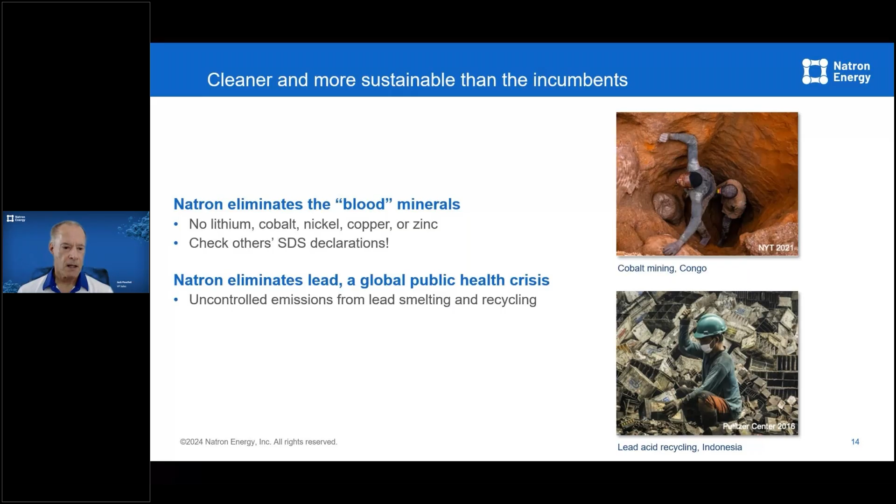So, yeah, thanks. So supply chain, made in America. We know that CATL and HiNa, BYD and others are doing, the French are doing sodium ion chemistries. We know the UK, India. It's being developed around the world. Prussian blue, a lot of patents, a lot of protection, made in the United States. Santa Clara, Holland, Michigan. Natron announced a Gigafactory in North Carolina for a 2027 timeframe.

So very excited about the batteries being made here, but more importantly, the raw materials for the batteries can and are being sourced in the United States. And as we look at what's going on around the globe, we certainly want to take advantage of local resources as much as possible. I don't plan to buy land in Wyoming, but I do appreciate the insight to how much sodium carbonate is available in Wyoming.

When we look at this in terms of supply chain, logistics, there's a tremendous amount of benefits. The interesting thing, from our perspective, is that with Prussian blue analogs and most designs of sodium ion technologies, you can put these into a lithium ion factory. So you're not reinventing the wheel, you're not creating a new framework and a new platform from a manufacturing perspective, right? You don't need new equipment. You use very similar equipment. You do plate thicker, so we didn't get into that. I'm looking at the time clock and I realize people are going to have questions.

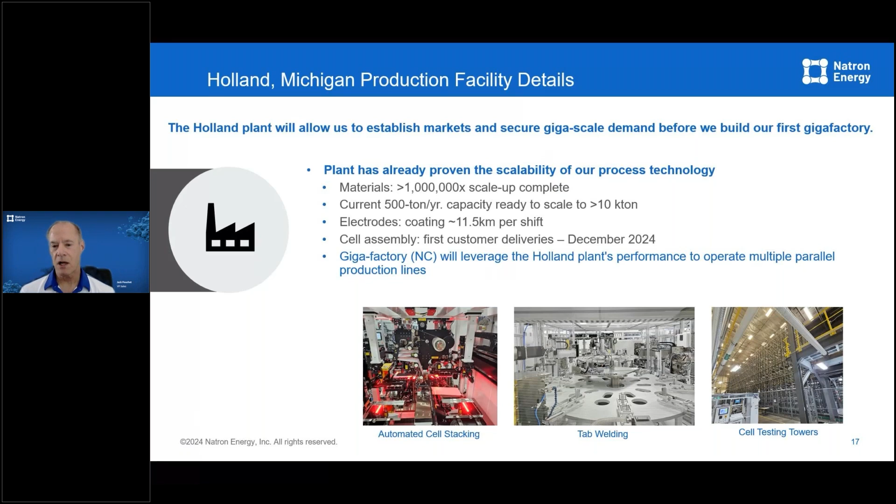If someone has run a lithium-ion battery plant before, you eliminate a couple steps. You don't have an SEI boundary layer. You don't have a formation step, so you take that out of the factory, and pretty much everything else looks very similar to what you would see in a lithium-ion factory. But we'll move on. And again, supply chain, very easily controlled, can be duplicated on other continents. So we can cut and paste what's done in the United States, move it to EMEA, move it to Southeast Asia, very simple to go.

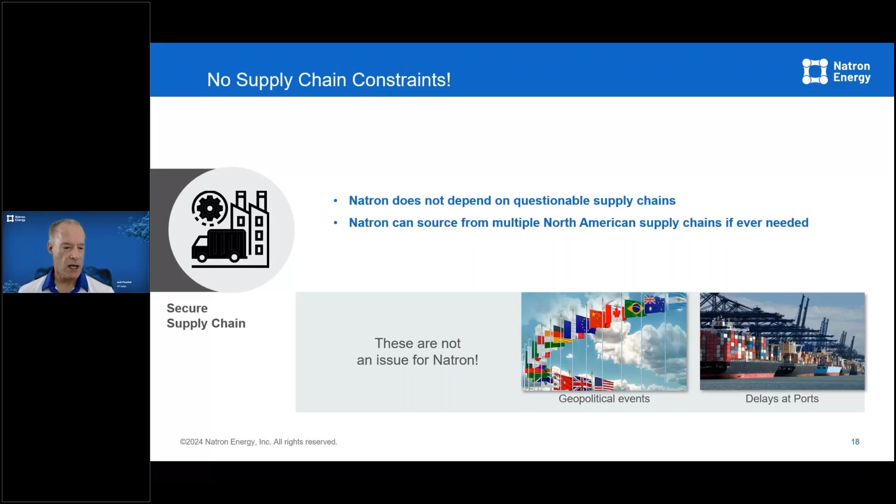Next slide, I don't want to get too commercial here. Talk about some products. So Natron is commercial. We are shipping a 48-volt battery pack, 25 kilowatts. Back to the energy density, that's about 1.2 kilowatt hours. So we have developed a power battery. We are not interested in 4-hour, 8-hour, 12-hour discharge.

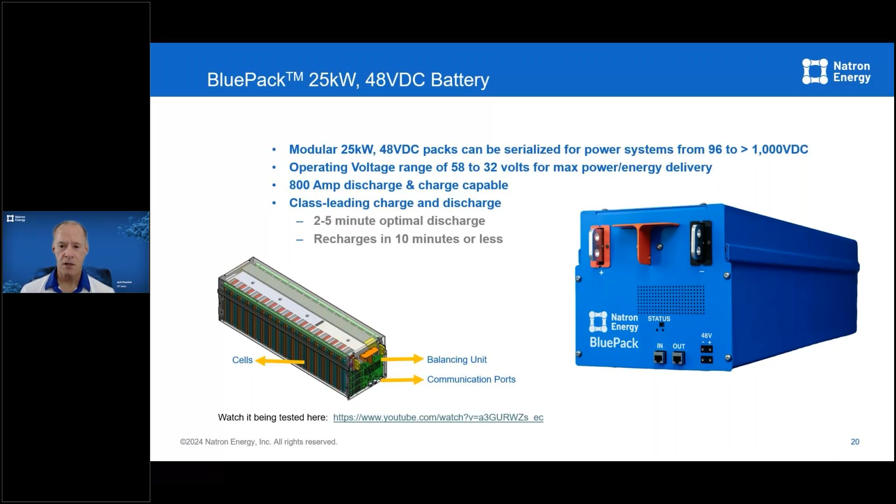I'm going to talk in a moment about other people who are with sodium-ion chemistries. There's some brilliant chemistries out there for 8-hour, 10-hour, 12-hour applications. Natron is focused on peak shaving, short duration, defense applications where you need a tremendous amount of power in a very short period of time, data centers, etc. And that's a product that we are shipping today out of our facility in Holland, Michigan. Next.

And related to that, we take it and put it in a big battery cabinet. So you take one, put 10 together, you got a string, 250 kW at a 2-minute discharge, 340, 350 kW at a 1-minute discharge. We don't discuss how much power you can do in a very, very short time, because it's all related to how much copper you can put on the system. And system impedance is not battery impedance, but people are cycling it for incredibly short duration applications. 5 to 10 minutes is probably the range of how far you want to go. Again, this is not intended to be a 4-hour, 8-hour, 12-hour battery. Short duration. Next.

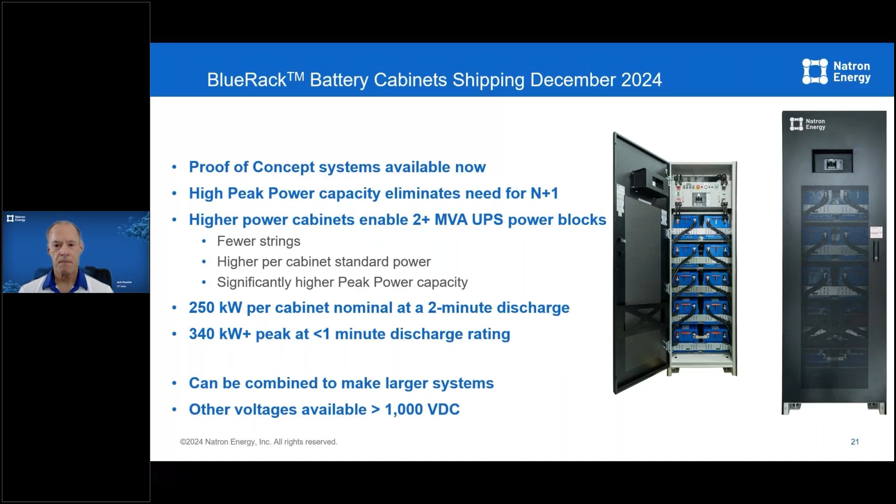So, as I said, what are the applications where we're at? We're shipping these into data centers today, typically bridging to another energy source. So you're either going to diesel gensets, natural gas gensets. You could be going to fuel cells, which have somewhere between, PEMs 42 seconds to 50 seconds to get the full power. Solid oxides much longer, or other renewable energy source system. You could be going to a flow battery. You still have bridging and you still have peak power applications where a sodium-ion battery fits in.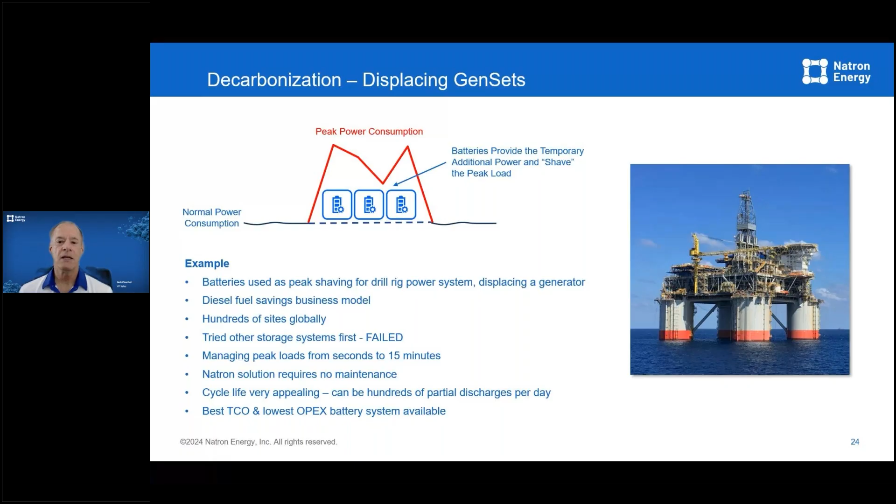And I kind of hinted at microgrids with the oil and gas platform, but microgrid applications, industrial applications, dark start applications, high peak power. I tell people all the time, if you had a 1 megawatt hour rated Prussian blue sodium-ion battery, I'm going to have 30 to 50 megawatts of peak capacity. So dark start. Next.